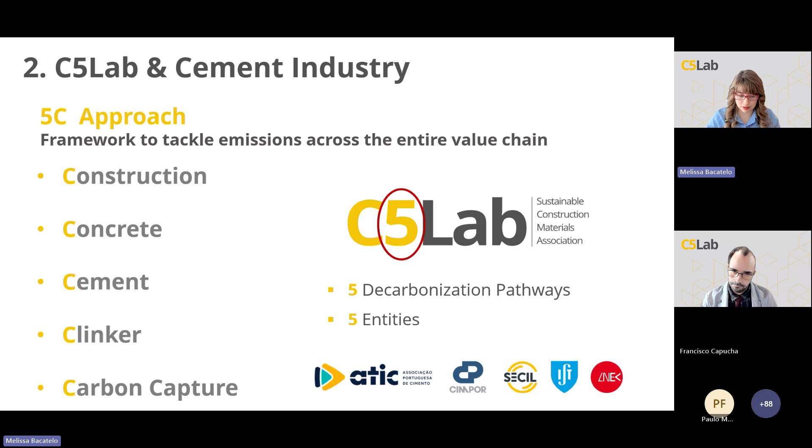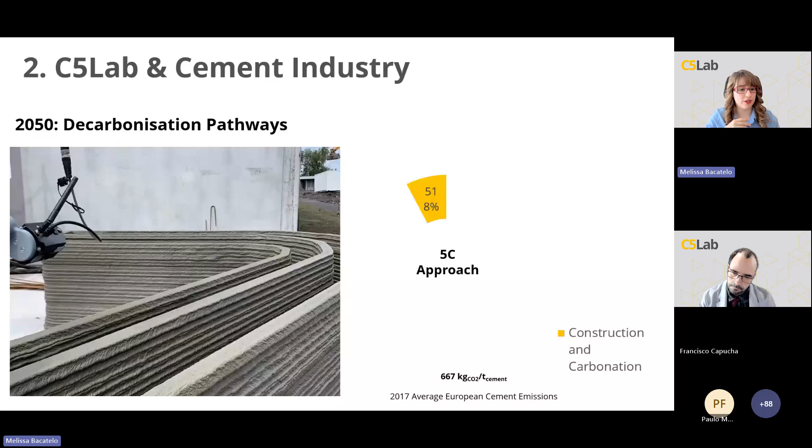Across these 5 areas, we tackle every opportunity for transformation. It begins with construction using technologies like 3D printing of concrete. We can also use captured CO2 to produce concrete with recycled aggregates and replace transportation with lower carbon alternatives.

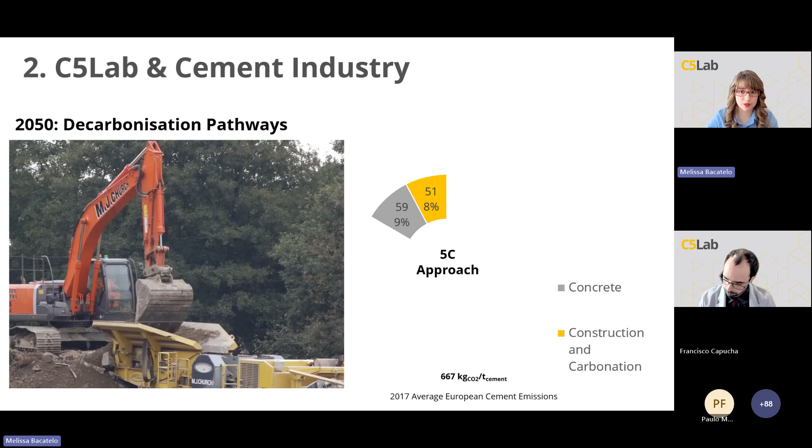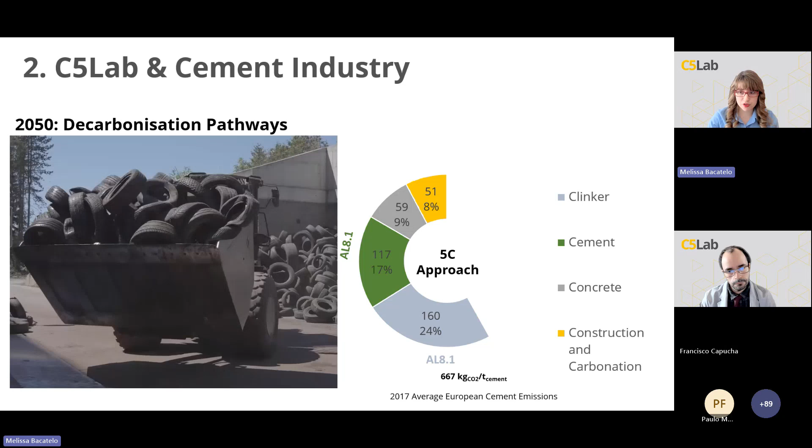In the cement stage, the focus shifts to clinker substitution and the adoption of renewable energies. In the production of clinker, there's potential to reduce emissions, namely through the use of alternative fuels such as scrap tires. These 2 pathways are further explored in the 8.1 project.

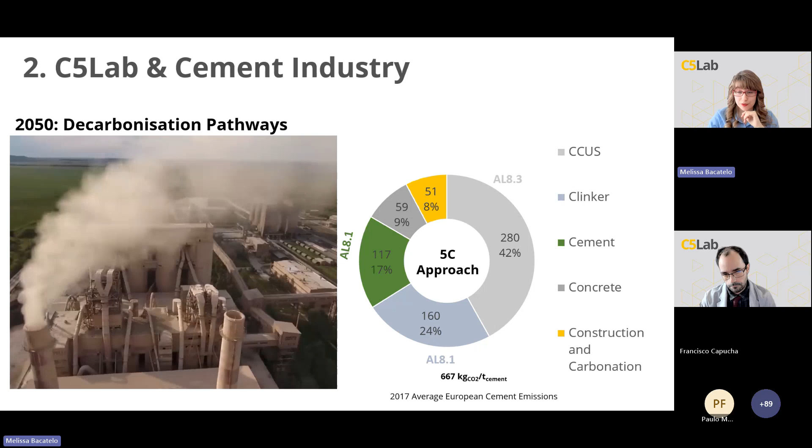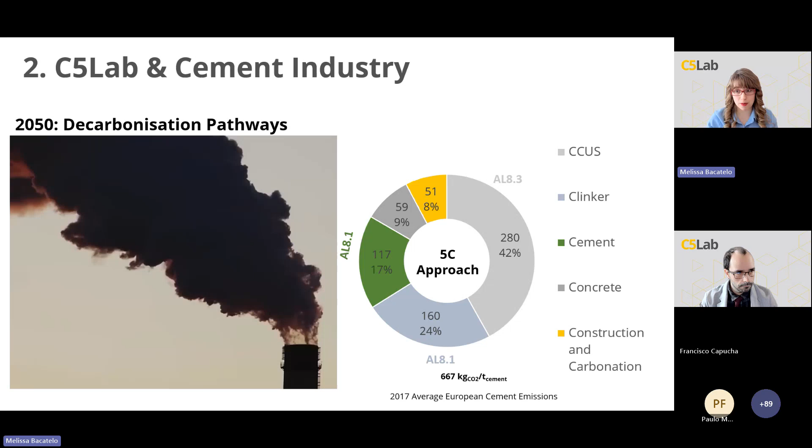However, carbon capture, utilization, and storage (CCUS) is an indispensable solution with the potential to reduce up to 42% of remaining emissions by storing it or transforming CO2 into usable fuel, for example, contributing to the industry's energy independence, as you'll see in Project 8.3.

At C5 Lab, all our work aligns with this vision through 3 core research areas, starting with CCUS. We're not just capturing CO2, we're giving it a second life. Our teams are developing processes to convert captured CO2 into synthetic fuels like methane or methanol.

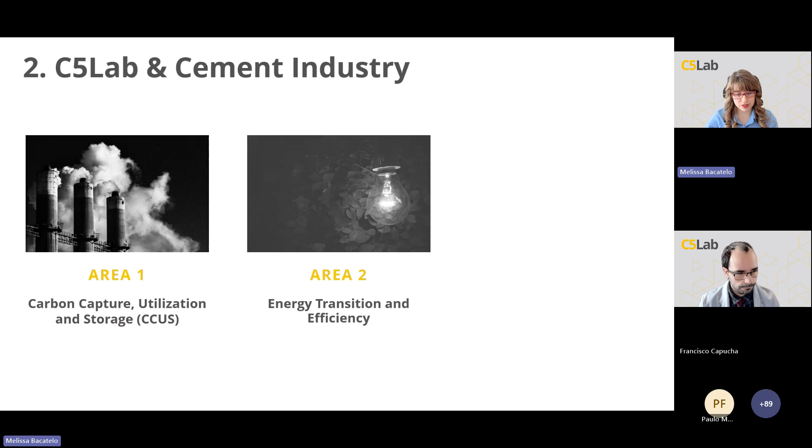The second area is all about energy transition and efficiency. We optimize grinding processes, improve heat recovery, and replace fossil fuels with green ones. The third area focuses on novel cementitious materials for sustainable construction.

We're rethinking materials from the ground up, developing eco-efficient concretes that use secondary raw materials, alternative binders, and recycled aggregates. Using life cycle assessment, we can evaluate each material's true environmental footprint. Together, these three areas turn a centuries-old material, cement, into a platform for innovation.

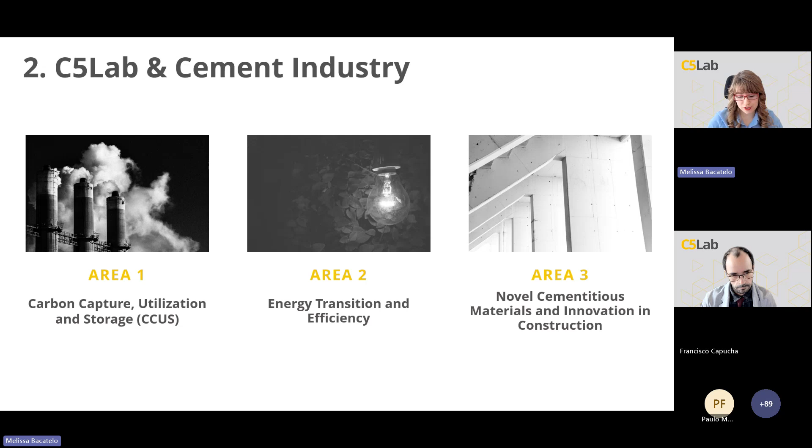In our daily work, we combine a wide range of skills to accelerate sustainability in the sector, from consulting, including environmental product declarations, to research and innovation projects. We carry out in-depth analysis in our lab, and we complement these activities with technical training, empowering teams to implement sustainable practices.

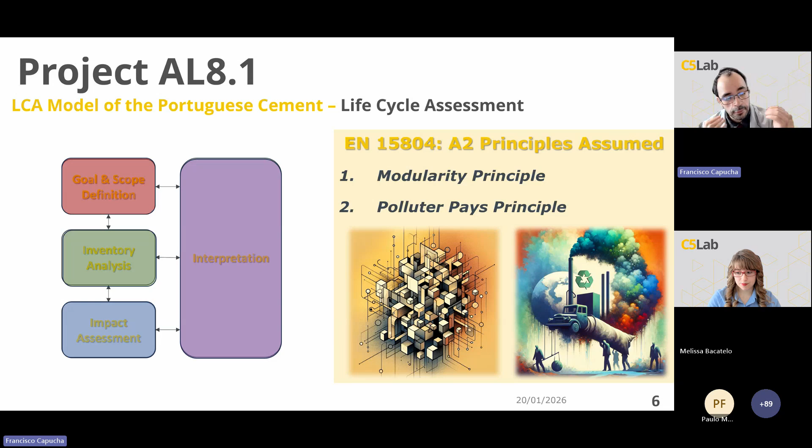In addition, the boundaries of the system study also follow some principles, named the principle of modularity, whereby processes must be assigned to the module where they occur, and the polluter pays principle, whereby the impacts of waste are attributed to the system that generates it.

The main life cycle assessment model is a cradle-to-gate study whose declared unit is 1 ton of Portland grey cement, and it was prepared in accordance with standards, namely standard EN 15804, which is the standard for producing environmental product declarations.

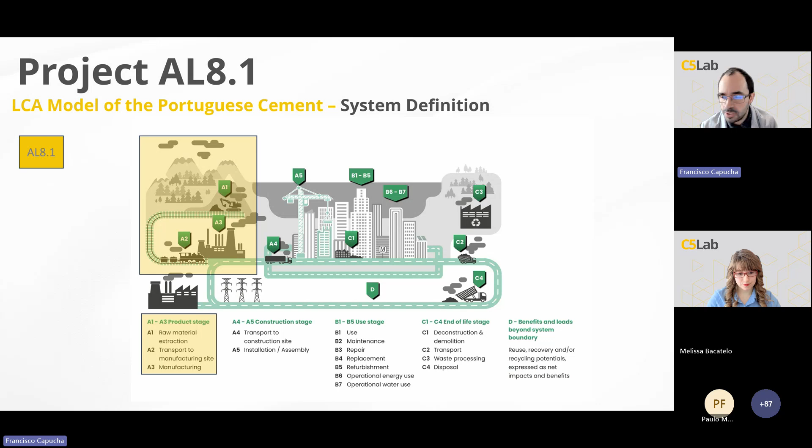Being a cradle-to-gate eco-profile means that the model covers information modules from A1 to A3. This means A1, raw material extraction, A2, transport to the manufacturing site, and A3, the manufacturing itself.

As for the selected system boundaries, the geographic boundary is located within mainland Portugal. The reference year chosen was 2018, because the project started in 2020 and, for reasons of industrial confidentiality, only data that is 2 years old could be used.

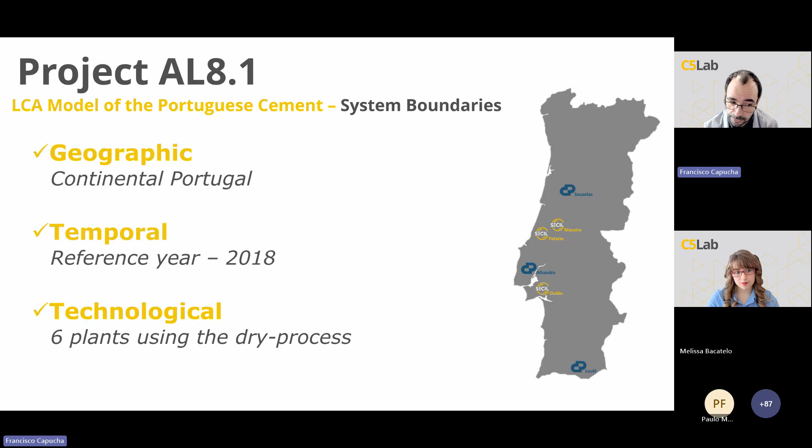Finally, it should be noted that there is a great deal of technological homogeneity, as all manufacturing units use the same production method, which is the dry process.

In order to properly model the life cycle of a product, the life cycle assessment analyst must understand the entire manufacturing procedure. For cement, it starts with the procurement of raw materials, being them either primary or secondary, with either external or internal origin.

This is followed by the transportation of these raw materials and fuels to the manufacturing site, by either freight transport or conveyor belts in the case of the internal quarries.

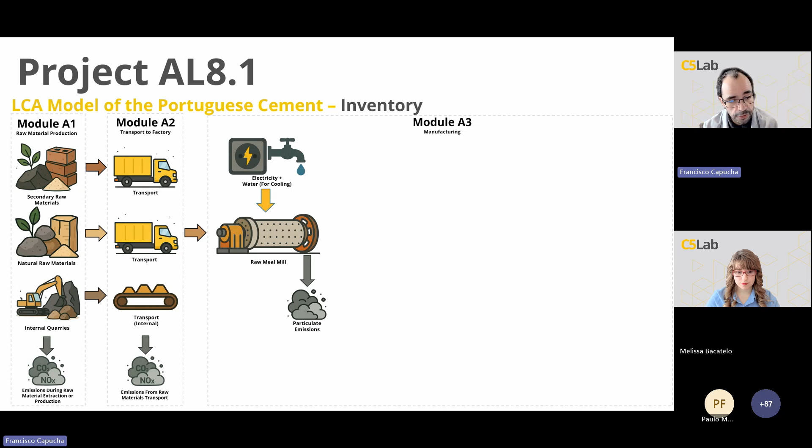As the raw materials arrive at a manufacturing facility, they enter a mill denoted the raw mill, in predetermined fractions, where they are milled to prepare them for the next step, which is the rotary kiln. Within it, temperatures reach up to 1400 degrees, with key reactions occurring, particularly calcining, which creates the intermediary product clinker, the main constituent of Portland cement.

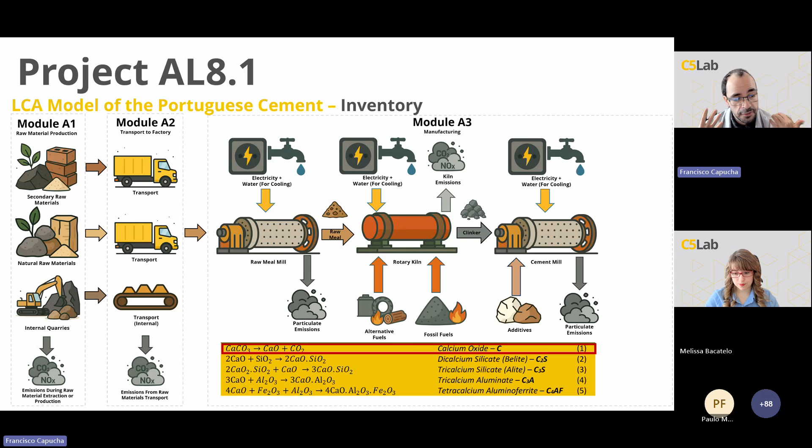After cooling, the clinker enters the cement mill, where, together with predetermined mixtures of additives, it is milled to produce the desired cement blend.

It should be noted that for the modeling of this model, we considered electricity generation to be foreground, even though producers have no direct influence over it, but it's such an important process that it had to be modeled using primary data. For the background processes, whose producers do not have direct influence, such as the production of additives, generic data was used, and this generic data is usually referred to as secondary data.

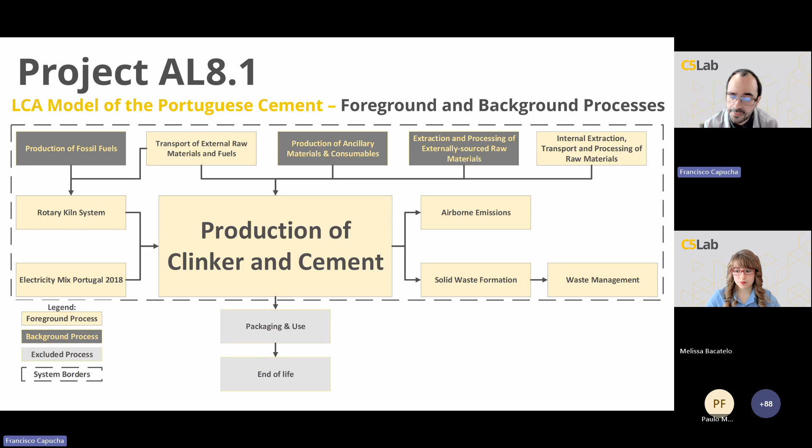All primary data is based on industrial statistics from the 6 factories. As for the secondary data, it was obtained from Ecoinvent 3.9.1 or other EPDs.

The primary data was collected in collaboration with the Portuguese cement industry, represented by ATIC, Secil, and Cimpor, on behalf of C5 Lab. However, industrial confidentiality required the consolidation of data. Therefore, in collaboration with the industry, an automatic consolidation sheet was developed to allow data to be provided anonymously.

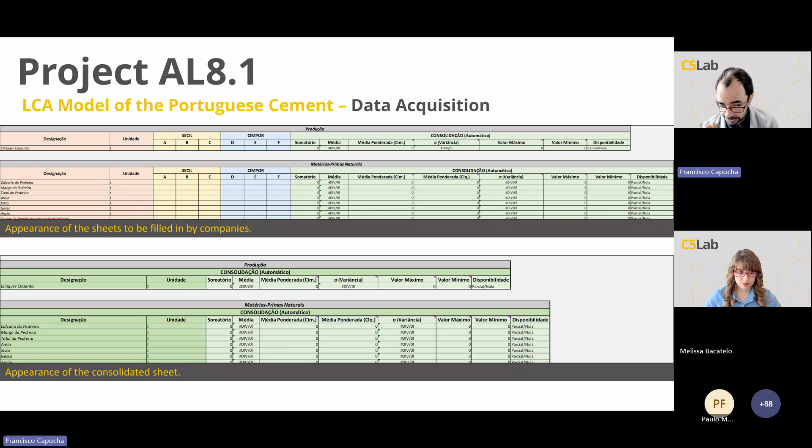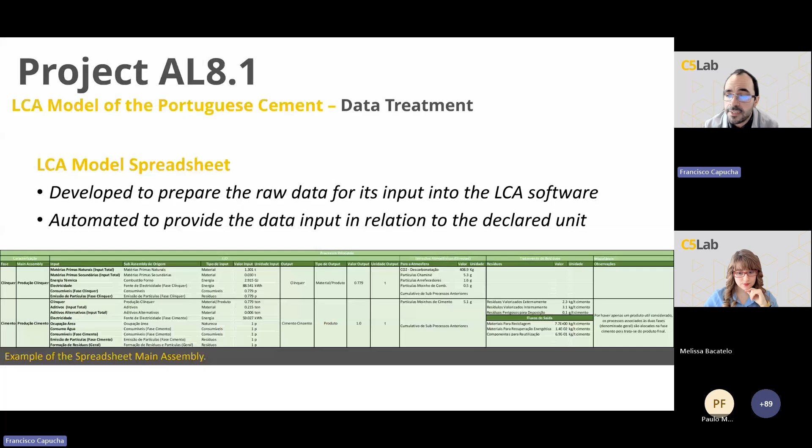With all data collected and consolidated, there's then the need to process it to be suitable for the LCA software. An automated spreadsheet was programmed to calculate the flows according to the declared unit, preparing the data for input into the lifecycle assessment software, which in this case was SimaPro.

Once the manufacturing process is known and the entire inventory data is provided, the life cycle assessment analyst creates flowcharts to guide them to produce the manufacturing procedure.

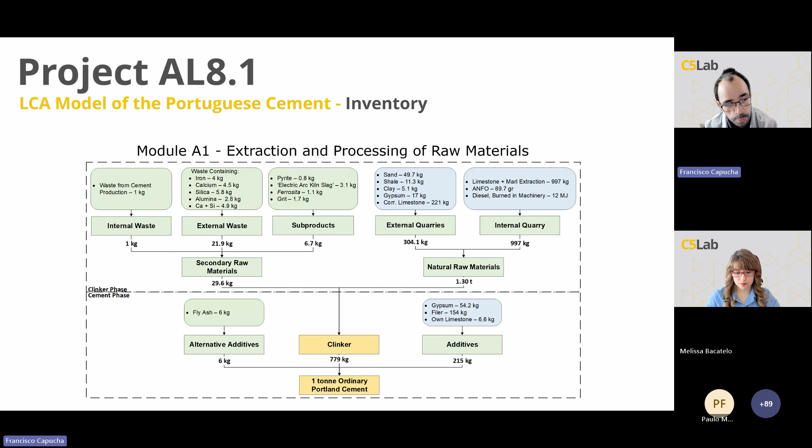The following diagram illustrates the flows associated with module A1, which is concerned with the extraction and processing of raw materials. Here you can see the flow of raw materials needed to produce one declared unit, which is 1 ton of ordinary Portland cement.

Since the reference year was 2018, we used the energy mix for that year, and we obtained this information directly from REN, which is the Portuguese entity responsible for the handling of electricity.

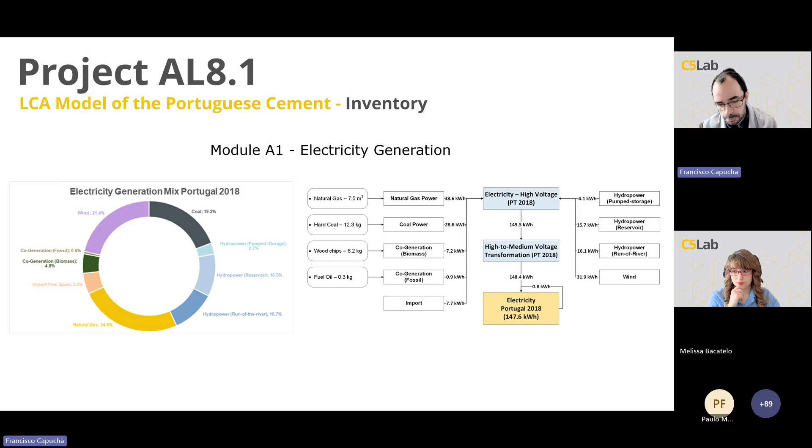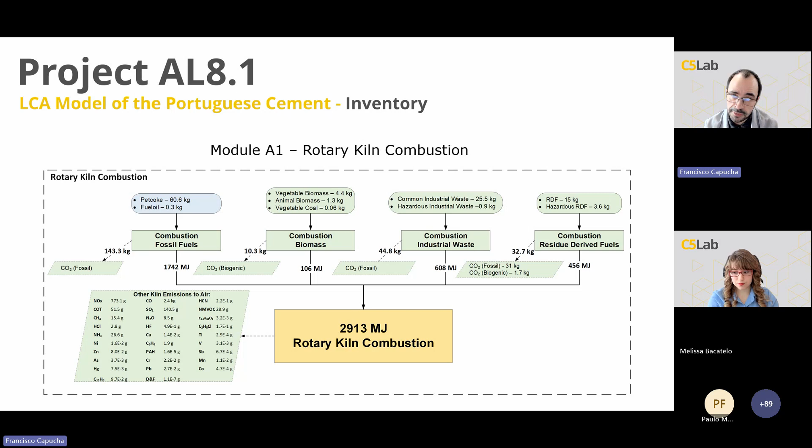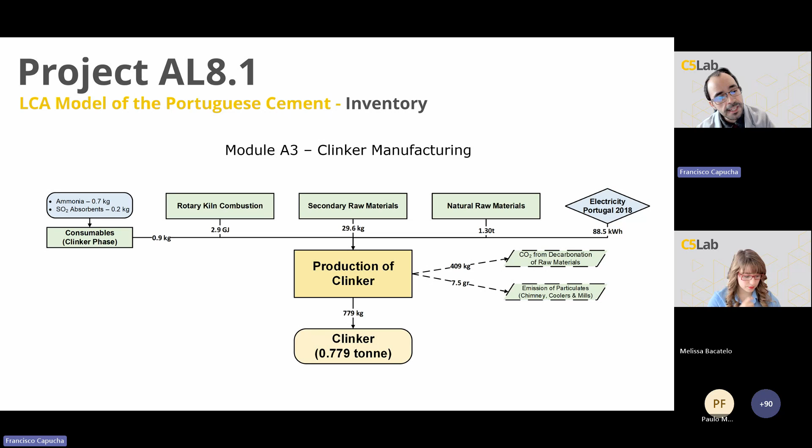As for module A3, it corresponds to the manufacturing procedures themselves for the products. This diagram illustrates the flows necessary for the manufacturing of the intermediary product clinker in sufficient quantity for the production of the declared unit, which can be seen in the following diagram.

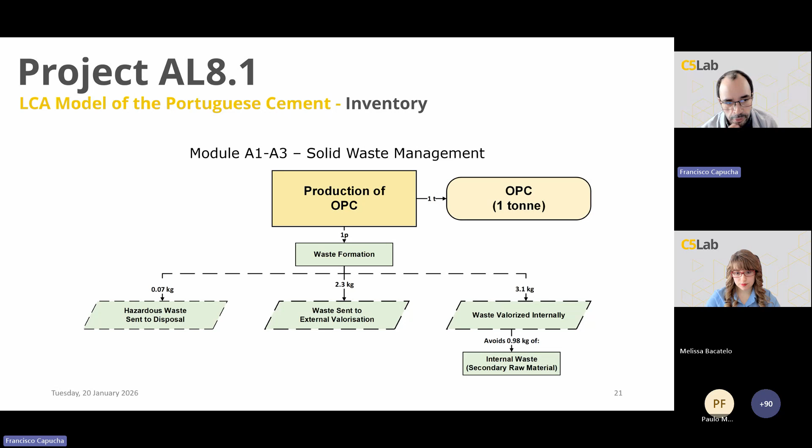Waste is generated throughout the whole production chain, and so the management of this waste is also modeled throughout the production, and you can see here in this diagram the production of waste and its management.

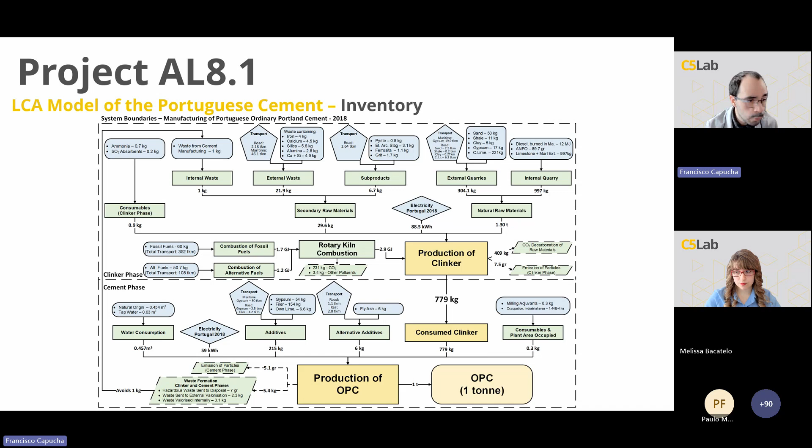And finally, we have the following chart, which depicts the entire manufacturing chain. This is the entire model that was inputted into the LCA software. It is all the flows necessary to produce 1 ton of the average Portuguese grey cement. This was modeled in the software SimaPro and includes all necessary flows.

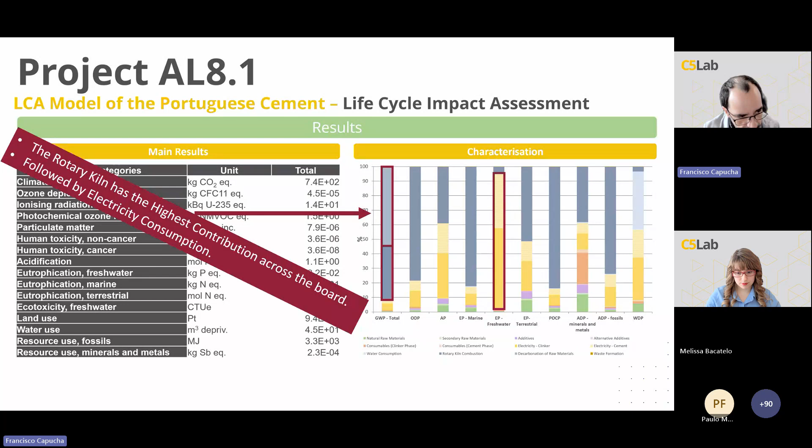This was then followed by electricity consumption, which is also highly relevant in some categories, such as freshwater eutrophication or acidification, concluding that energy consumption, together with calcining, is the major contributor to the cement environmental profile.

This is further supported by the carbon footprint, where it's clear that the activity in the rotary kiln, so the fuel combustion and the calcining reaction, has by far the highest contribution, followed by electricity consumption, with all remaining processes contributing only around 1%.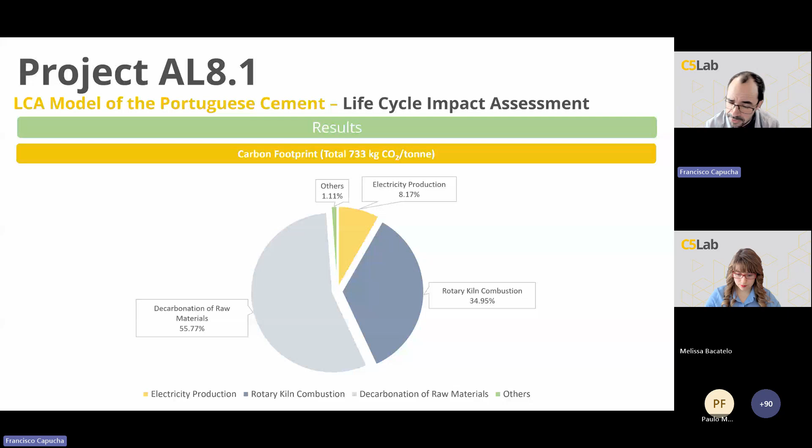The trend continues when analyzing the primary energy depletion, where it's possible to conclude that the rotary kiln depletes over 2.3 gigajoules of non-renewable energy. This model does not consider the procurement of alternative fuels, because due to the producer polluter pays principle, they are excluded from the model. This is then followed by electricity generation, which depletes around 1 gigajoule.

However, due to the high incidence of renewable energy in Portugal's electricity mix, around 70% of it is considered renewable.

As for waste management, cement manufacturing is a highly efficient and mature industrial process, whereas only around 6 kilograms of waste are generated per ton of cement produced, and over 91% of it is valorized, either internally or externally.

In parallel, we also conducted a benchmark against some of its peers, concluding that the Portuguese average cement is equivalent to a European average CEM2 cement. This is noteworthy because the Portuguese average cement includes the production of cements with high clinker content, such as CEM1, whereas CEM2 is a blend with lower clinker content. So we are equivalent to that.

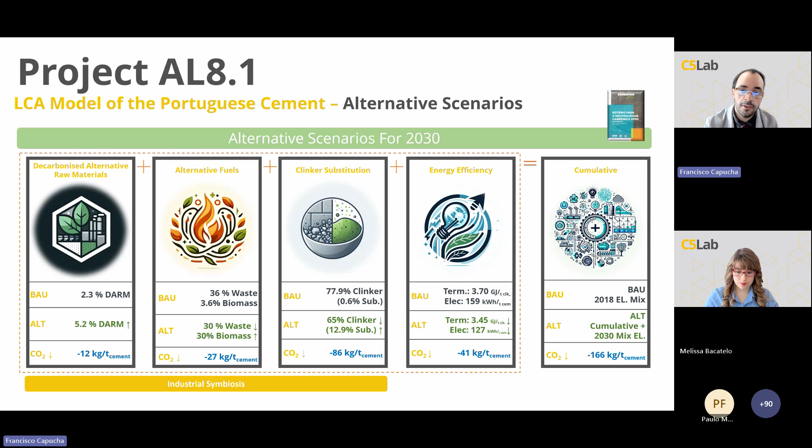We introduced this data into the new model, and the results for the alternative scenarios based on industrial symbiosis showed that the use of alternative raw materials and clinker substitution resulted in a reduction of carbon emissions. However, the use of alternative fuels led to a slight increase in emissions.

This was unexpected, and this increase was due to the fact that at the time, the modeling technique accounted for the biogenic emissions, so they contributed to the environmental impact. This is not currently used in cement manufacturing life cycle assessment models. Therefore, the results will be a bit different nowadays.

The replacement of clinker produced the most significant reduction due to the ambitious target of 65% average clinker content. Finally, we can also conclude that the inclusion of energy efficiency measures further amplifies the reductions observed.

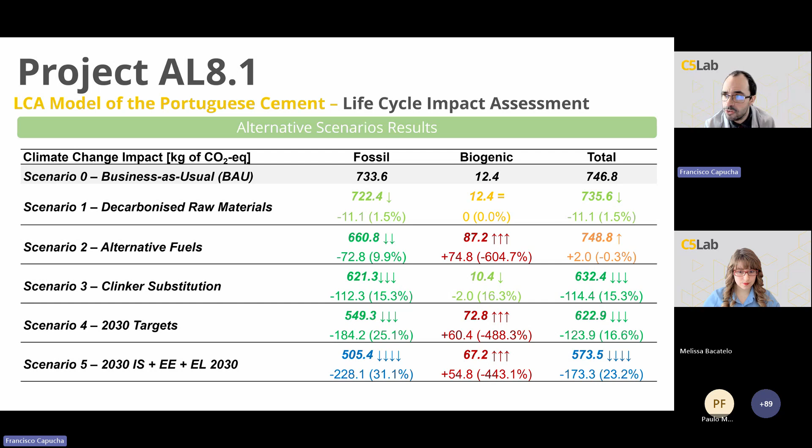When examining the variations in CO2 emissions, the effectiveness of clinker substitution can be observed, confirming the importance of controlling this ratio as the most important and most effective measure within the cement industry, other than carbon capture. We notice also a counterbalancing effect from the use of alternative fuels, caused by the increase of biogenic emissions.

However, with the new standards for assessing the environmental impact of cement, nowadays the alternative fuels used would actually produce a more robust reduction, so the results will be even more amplified nowadays.

Finally, a standardized comparison was made between the study results and the cement expectations for 2030 to assess its feasibility, and it can be inferred from the results that they are in line with the industry expectations, with only a slight higher impact than expected.

So we therefore confirm that the industry expectations, as set out in the roadmap for ATIC and CEMBUREAU, are realistic and can be enforced.

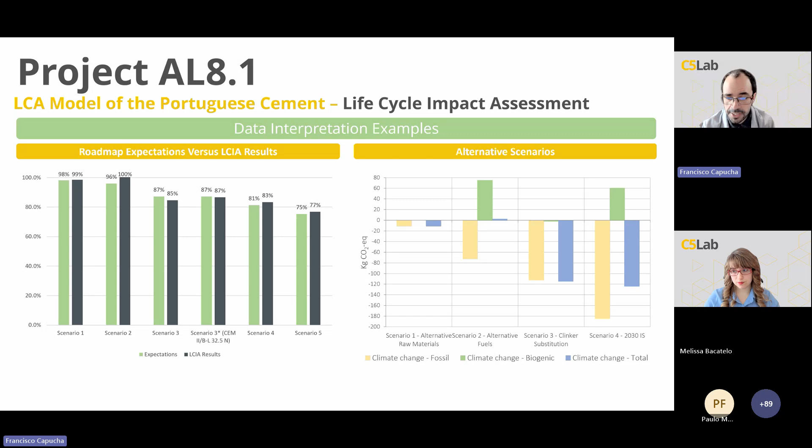Now we move to the second goal of Project AL 8.1, which was the development of the first EPD for Portuguese cement. An EPD, or Environmental Product Declaration, is a document registered and verified by an independent entity that communicates information about the environmental impacts during the life cycle of a product in a transparent, comparable, and credible manner.

It declares the environmental performance of a product based on the life cycle assessment models, with all information being verified by an independent entity, which guarantees transparency and enables an unbiased comparison of products. Since the results are pre-verified, environmental product declarations allow for a safe comparison of equivalent products across multiple databases.

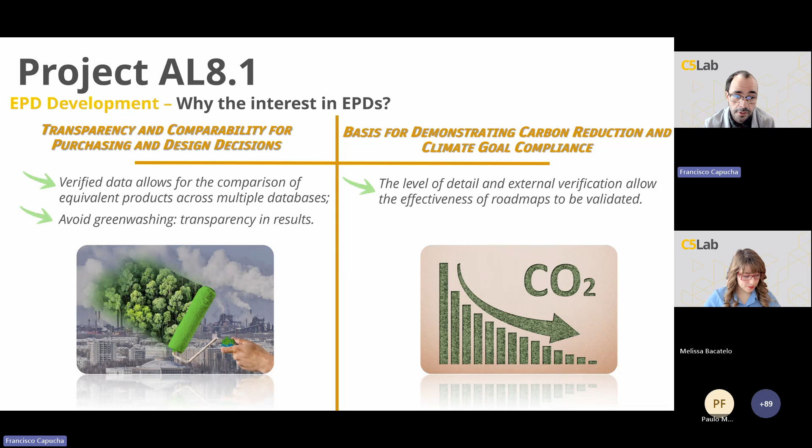This avoids greenwashing as all results must be validated before publishing. In addition, since EPDs are sourced from highly detailed life cycle assessment models and are verified, they allow, throughout the years, an accurate evaluation of the effectiveness of the environmental roadmaps of any sector.

There is a growing demand for building certifications such as LEED, and these often require environmental information that could be available from environmental product declarations. Without them, generic data may be used, and this could negatively affect results because generic data tends to be more conservative.

Moreover, there will be an increased integration of environmental information in documents, such as the declarations of performance, whose data can also be obtained from environmental product declarations. Therefore, companies that already implement environmental product declarations will be better prepared for its integration in such documents.

In reality, starting this year, the global warming potential will be mandatory as part of the declaration of performance, followed by a European mandate to perform life cycle assessment for buildings over 1,000 square meters in 2028.

In 2030, not only will additional indicators such as acidification be added to the declarations of performance, but life cycle assessment will be mandatory for all building sizes, finalizing in 2032, when the declaration of performance will essentially fuse with EPDs, and all information currently in EPDs shall also be present in the declaration of performance.

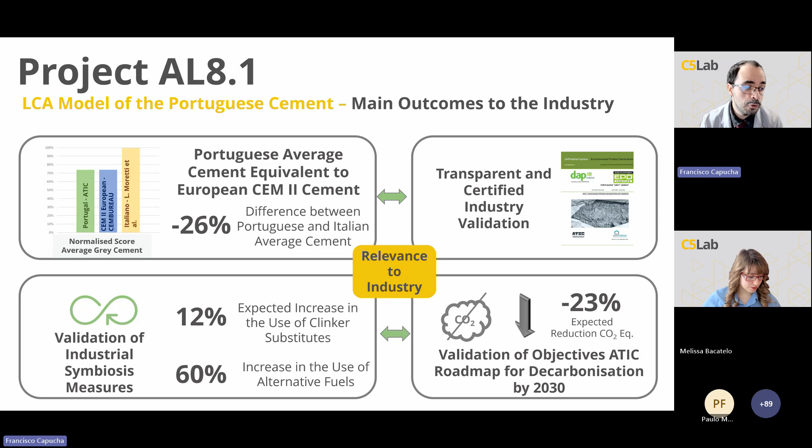The project was also able to confirm that the industrial symbiosis measures led to a 23% decrease in carbon emissions, validating ATIC's carbon neutrality roadmap.

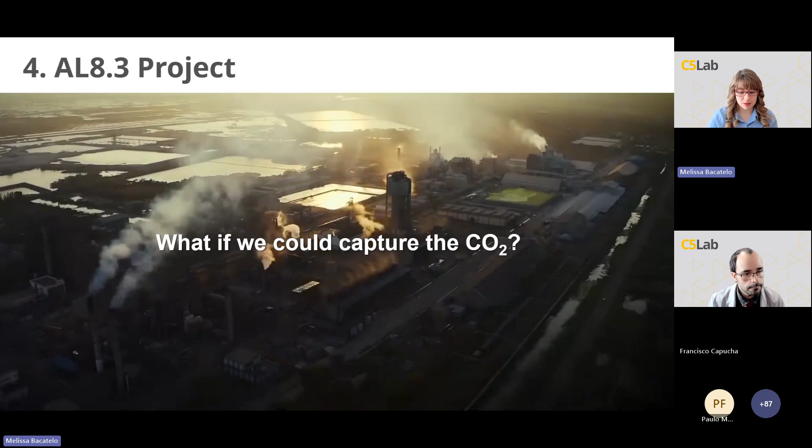Thank you, Francisco. So far, we've been imagining the world up to 2030. But what if we could capture that CO2 before it was even emitted into the atmosphere? Since CO2 emissions are intrinsic to the cement manufacturing process itself, it's particularly interesting to explore how we can capture these emissions. Imagine the cement factory emitting CO2: we can capture that CO2, combine it with hydrogen produced from renewable energy, and convert it into methane. The methane is then fed into the natural gas system to which the factory is connected, creating a closed loop that recycles CO2.

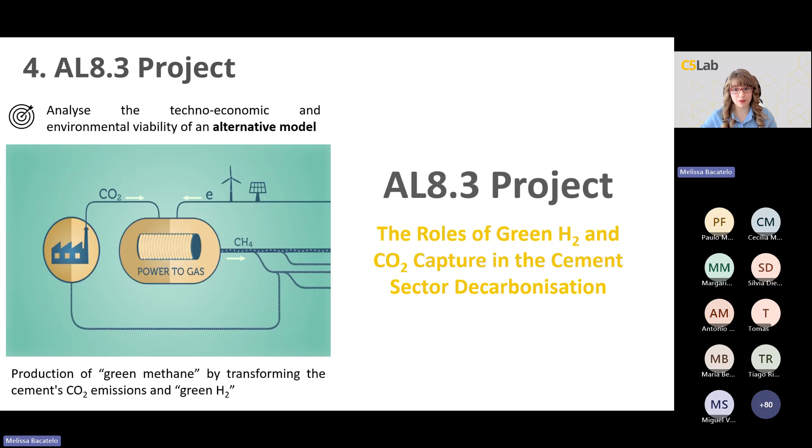The aim of the AL8.3 project was to design and analyze the techno-economic and environmental viability of such an alternative cement model. This promotes not only cement decarbonization, but also circular carbon economy and the factory's energy independence in an economically viable way, with a long-term vision towards 2055 at an industrial scale.

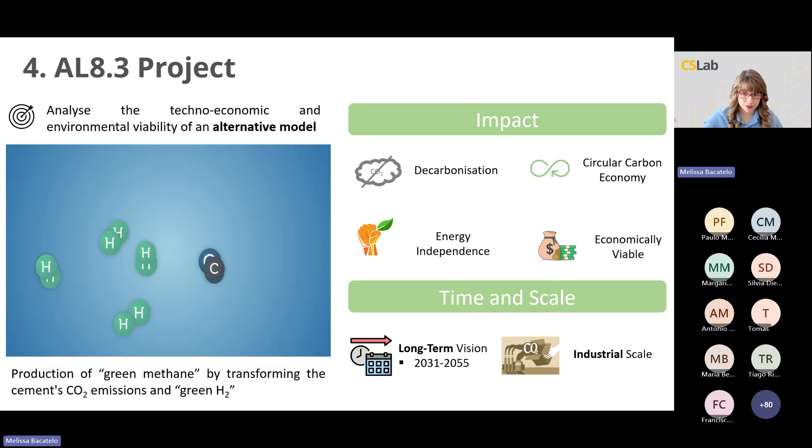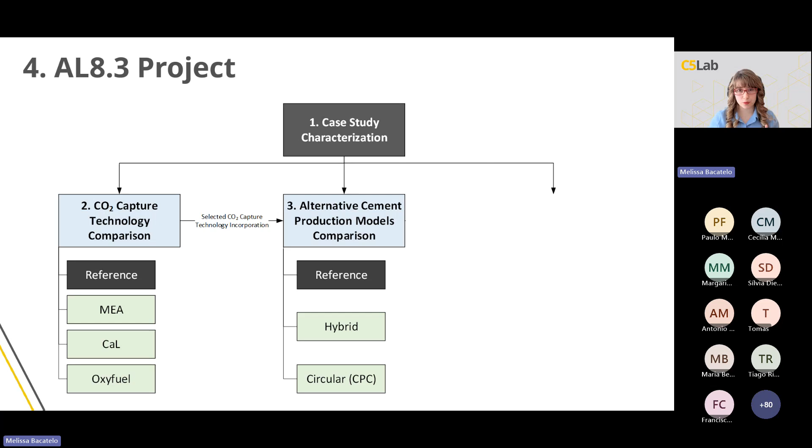The methodology was divided into 4 parts. We began by characterizing the case study to create a data benchmark for the next phases. Next, we compared 3 CO2 capture technologies through a multi-criteria evaluation covering technical, economic, and environmental considerations to select the most feasible one. The selected CO2 capture technology was then integrated into 2 proposed alternative cement production models, constituting the third part of the research. Finally, we carried out a life cycle assessment comparing conventional production with the selected innovative model, also analyzing different renewable energy sources.

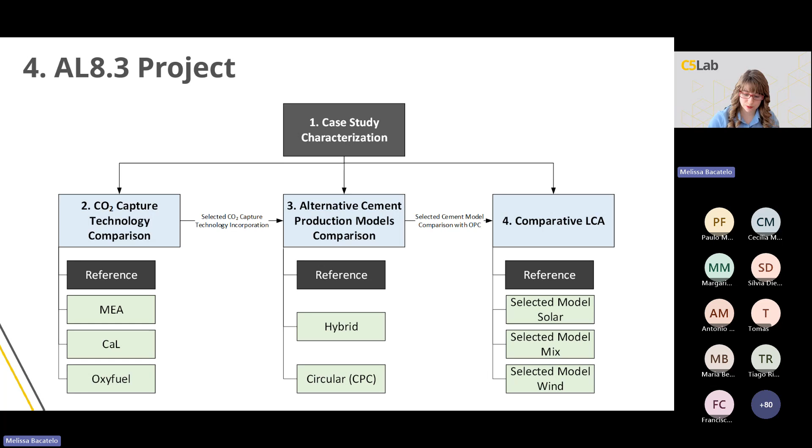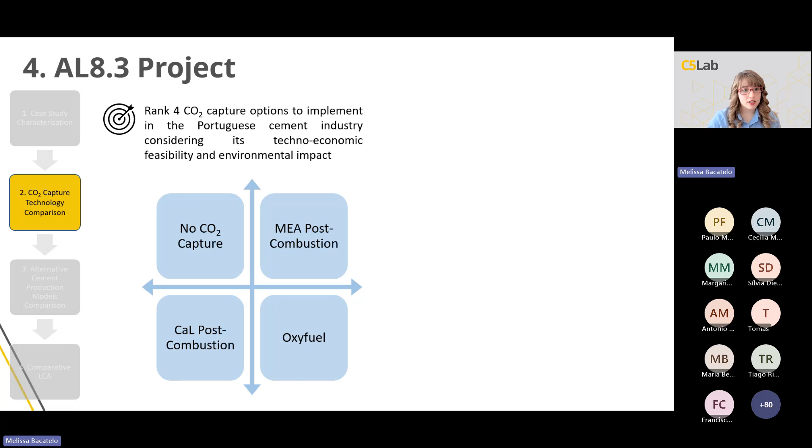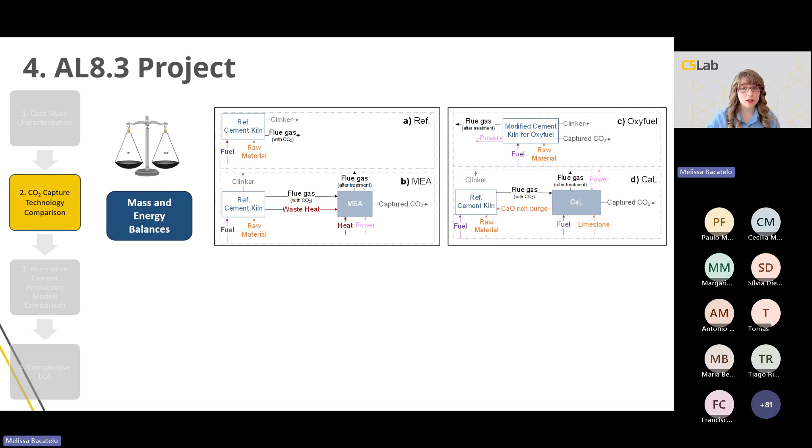We started by characterizing the Portuguese cement industry. Next, we compared 4 CO2 capture options based on techno-economic and environmental criteria: an option with no capture, monoethanolamine, calcium looping, and oxyfuel. The system boundaries were cradle to gate across 3 future scenarios. We calculated mass and energy balances and accounted for economic uncertainties due to the low maturity of these technologies.

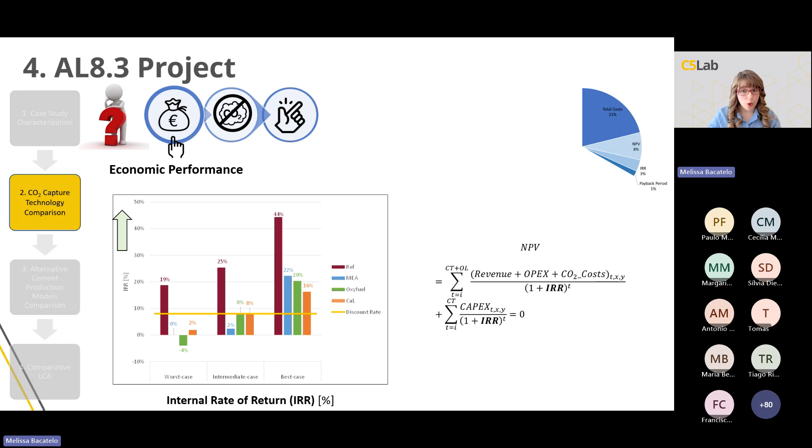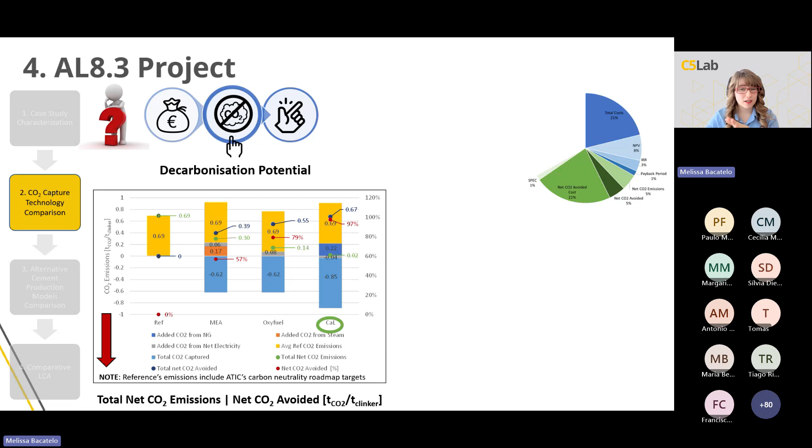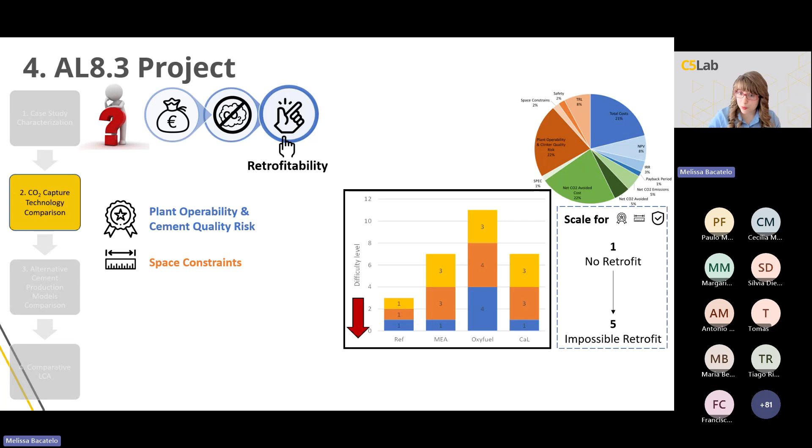We assessed economic performance using indicators like the net present value, which we aim to maximize. We also looked at the internal rate of return and the payback period. To assess decarbonization potential, we compared CO2 emissions of each alternative: they are lower for calcium looping, however oxyfuel requires less energy. We also rated retrofitability based on cement quality risk, space constraints, safety issues, and technology maturity.

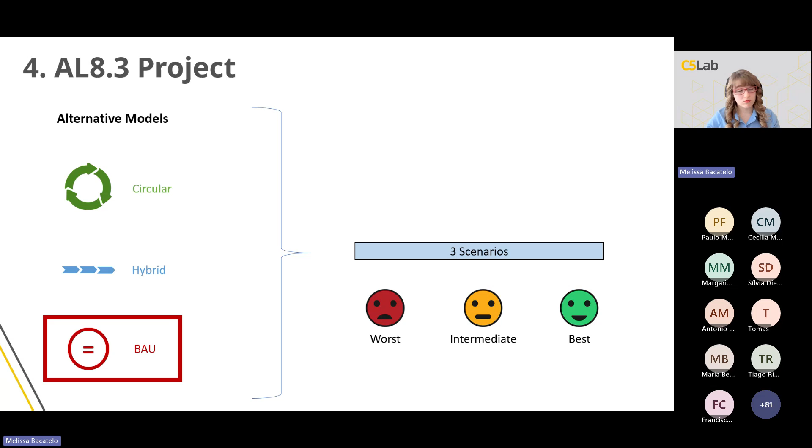Calcium looping moved on to the third research phase, where we compared 3 cement production models across 3 scenarios. First, the business as usual: no capture, no reuse, that's our baseline. Then, the circular model, where we capture the CO2 emitted by the clinker kiln and use water electrolysis to produce green hydrogen and oxygen too. That oxygen doesn't go to waste; it powers the calcium looping CO2 capture system.

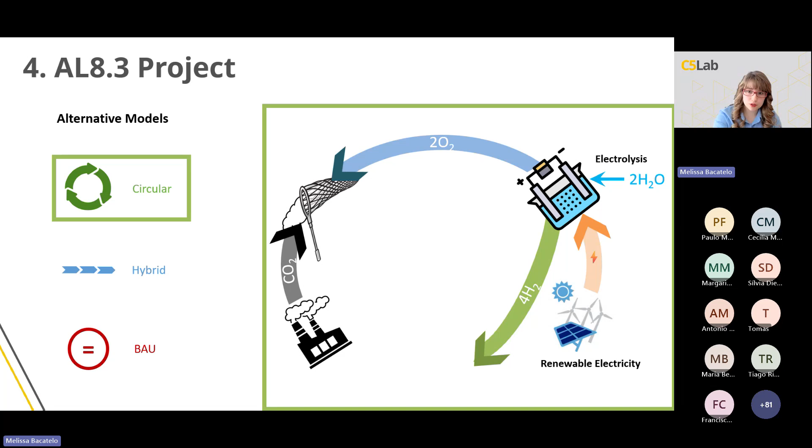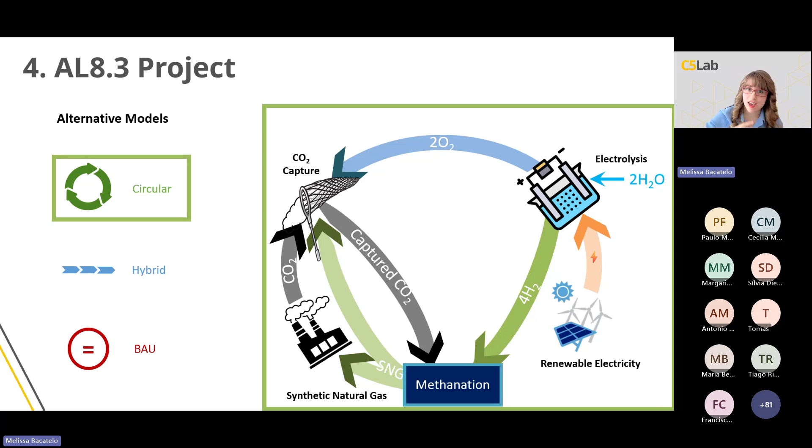Then comes the cool part: hydrogen and CO2 react to create synthetic natural gas, and that gas fuels both the kiln and the capture unit — a true circular CO2 loop.

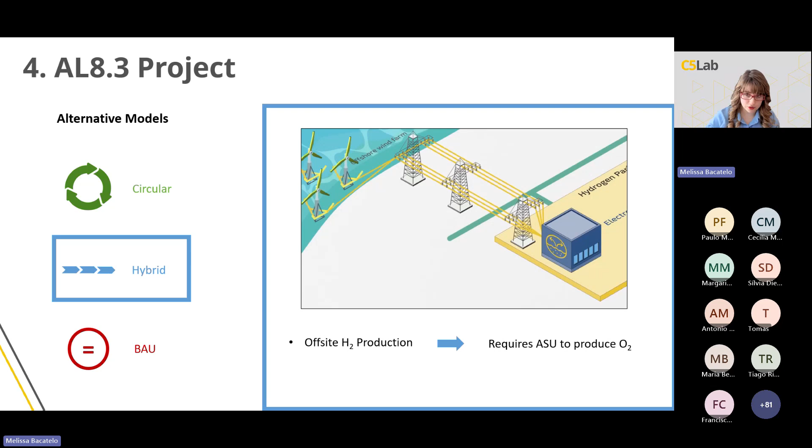In the hybrid model, things shift a bit. Hydrogen is transported through a dedicated pipeline, so there's no electrolysis on site, which means we need an air separation unit to produce oxygen. The CO2 is still captured and converted, but the methane is sold, not reused.

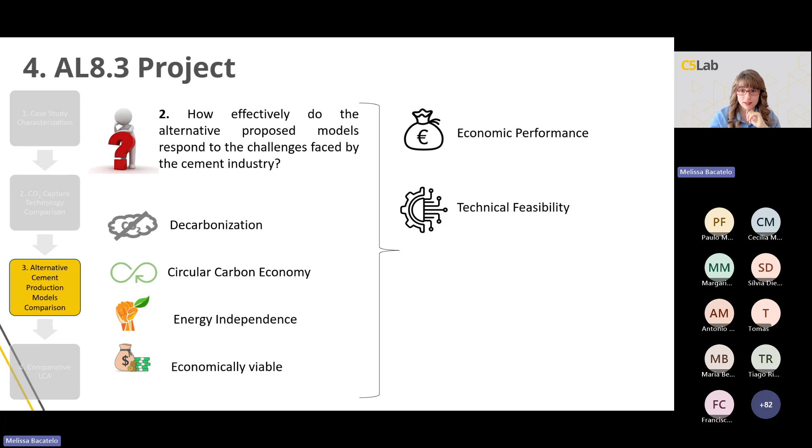So, which model gets us closest to our goals? To answer that, we broke our analysis into 4 pieces: economic performance, technical feasibility, decarbonization potential, and finally, eco-efficiency. I won't get too technical here, but we ran full mass and energy balances using primary and secondary data.

On economics, we looked again at the NPV, and it changed a lot depending on the scenario. In the best cases, both the business as usual and circular models were viable, but in the worst, none were. The internal rate of return favored the business as usual in an ideal scenario.

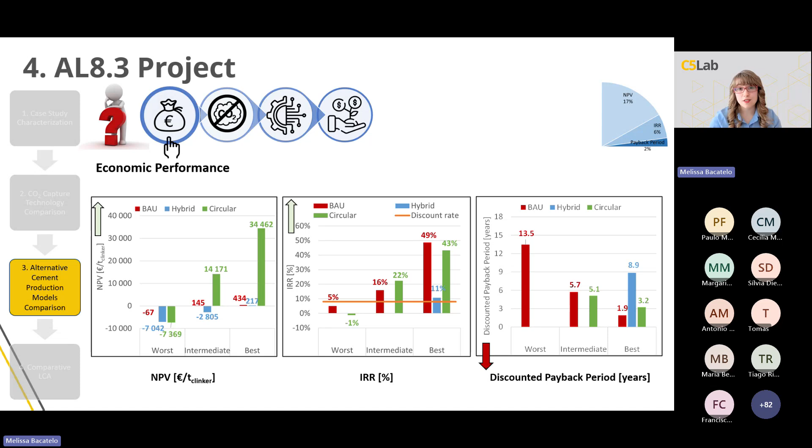But in more realistic conditions, circular takes the lead. And how fast can you get your money back? No surprises here, the shortest payback happens in the reference case.

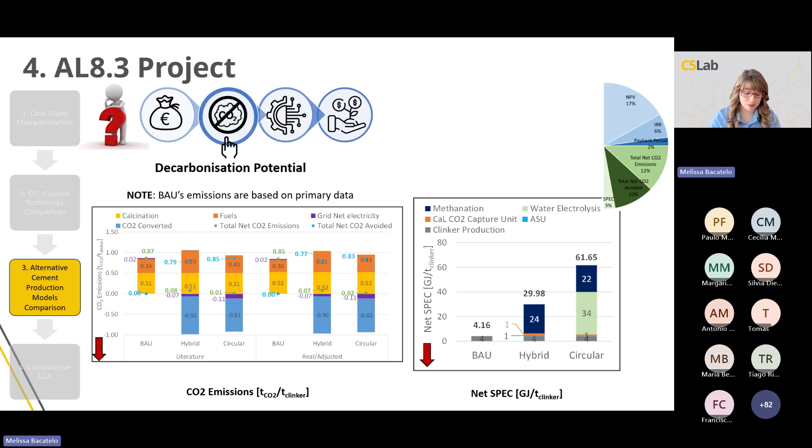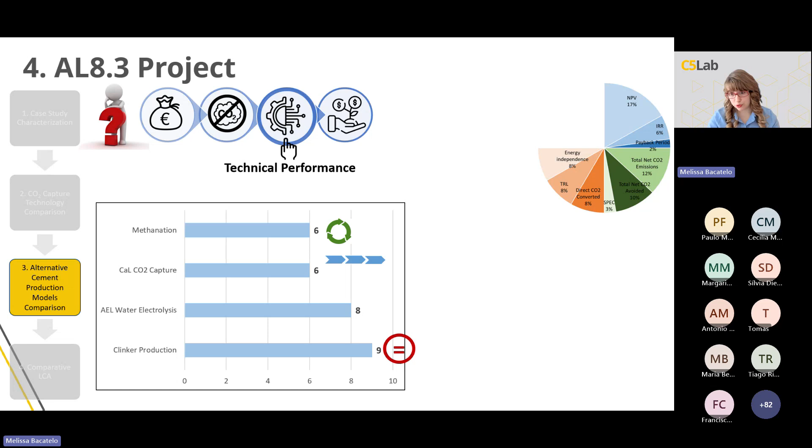The environmental analysis revealed that the circular model can reduce CO2 emissions by up to 98%, and even the hybrid model shows a significant reduction of 91%. But it comes at a price: the primary energy required for the circular model is 15 times higher than the reference, while the hybrid model is around 7 times. In terms of technical performance, the alternative models obviously have a lower technology readiness level than business as usual, but they present a higher energy independence.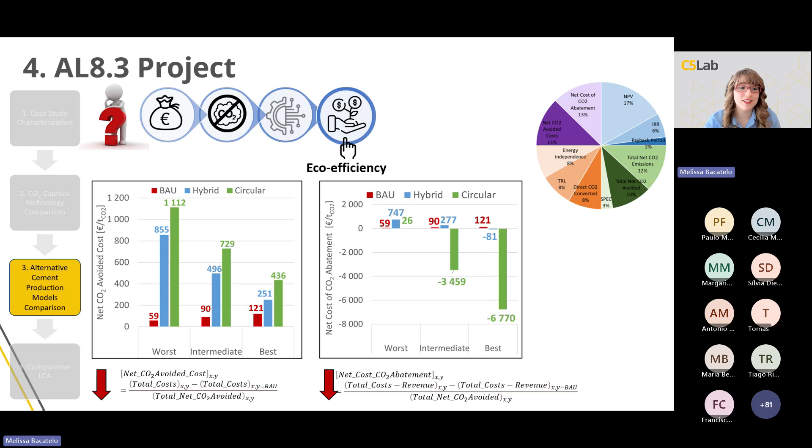To understand eco-efficiency, we merged emissions data with cost analysis. And here's the twist: selling surplus methane and oxygen makes the circular model look even better. The multi-criteria analysis revealed that the circular model ranked highest overall.

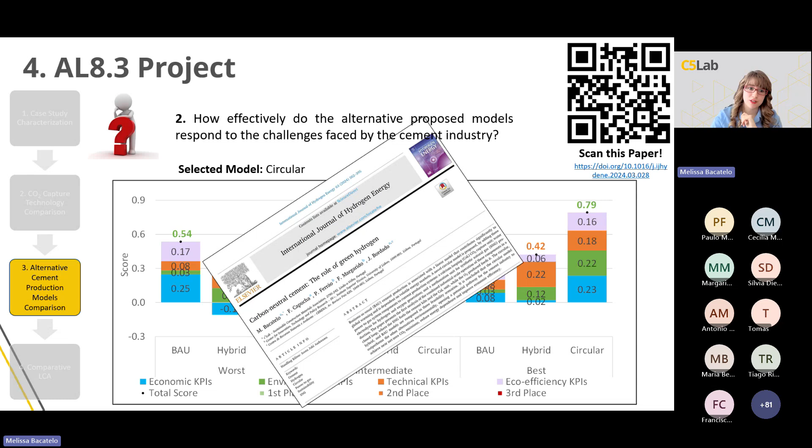Following on from this research, a second paper was published in the International Journal of Hydrogen Energy. Again, please scan this paper.

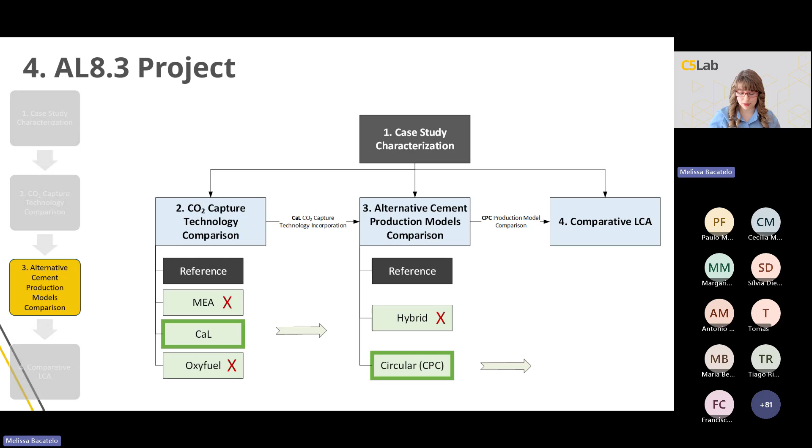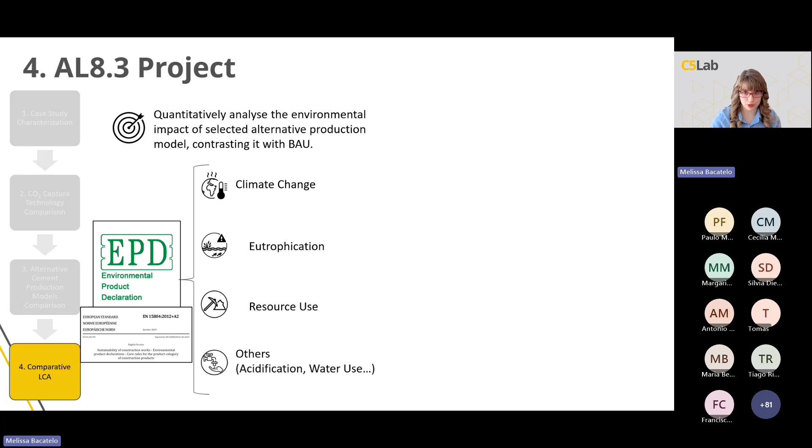With the circular model selected, we moved to the fourth and final research phase. Our final goal was to analyze the circular model's environmental performance using the same standards applied to construction products. We looked at key impact categories: climate change, eutrophication, resource use, and others like acidification or water use. We ran 2 models in SimaPro and tested 3 energy sources for electrolysis: solar, wind, and a mix of both.

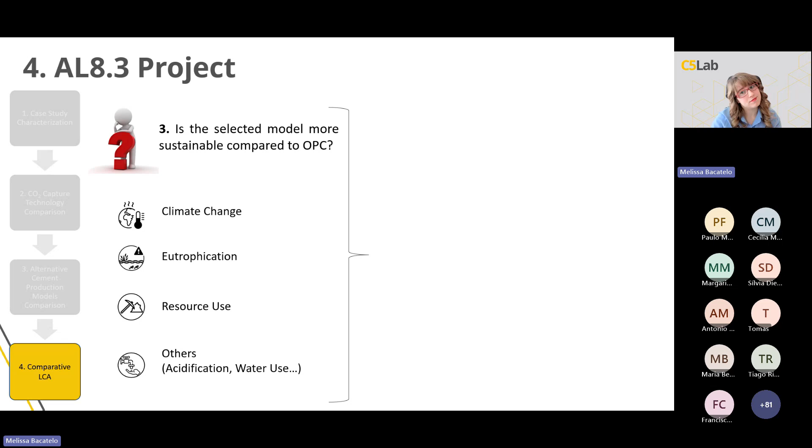This leads us to our final research question: is the circular model truly more sustainable? We broke this question into 3, starting by comparing the environmental impact associated with the circular model and business as usual, tested different renewable energy sources, and found the environmental hotspots.

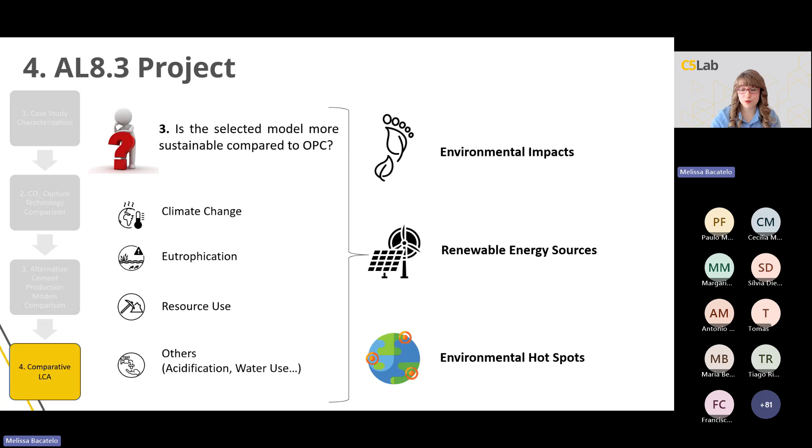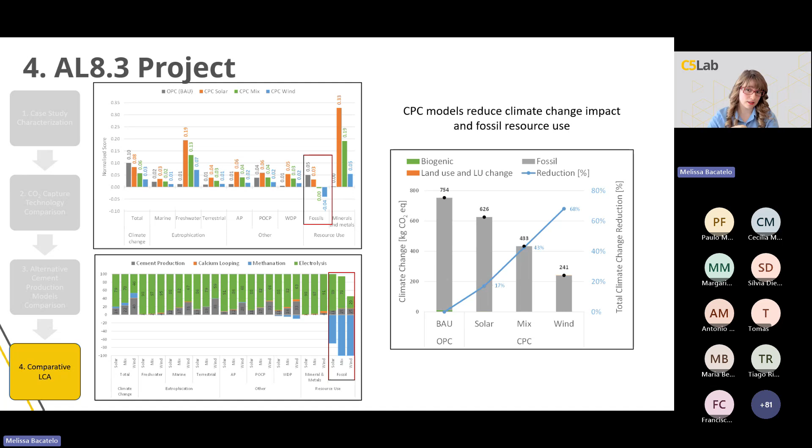The mass and energy balances were adapted to SimaPro, and the results show that the circular model can reduce the impact of climate change by up to 68% in the wind scenario. The hotspot analysis revealed a negative impact for fossil resource use, thanks to credits from avoided natural gas extraction through methanation. But here's the catch.

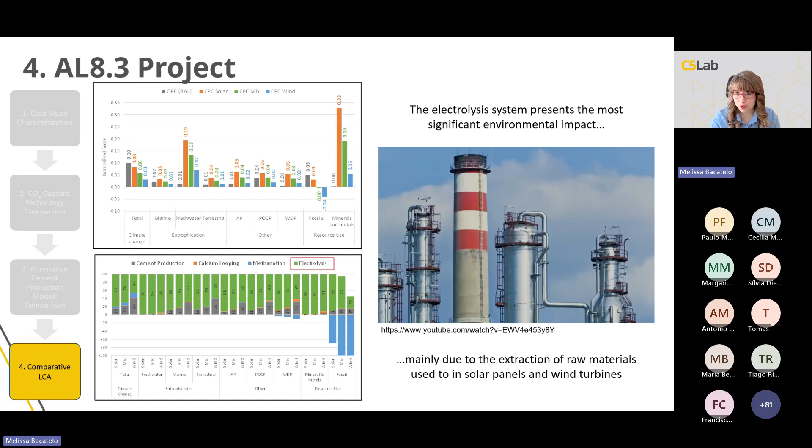Electrolysis had the highest environmental impact in all categories. And where does this impact come from? Mainly from the extraction of raw materials, some of which are rare, to produce the components of solar panels or wind turbines, although the impact of turbines is lower. In short, while the circular model offers major benefits, it also presents some trade-offs compared to the conventional model.

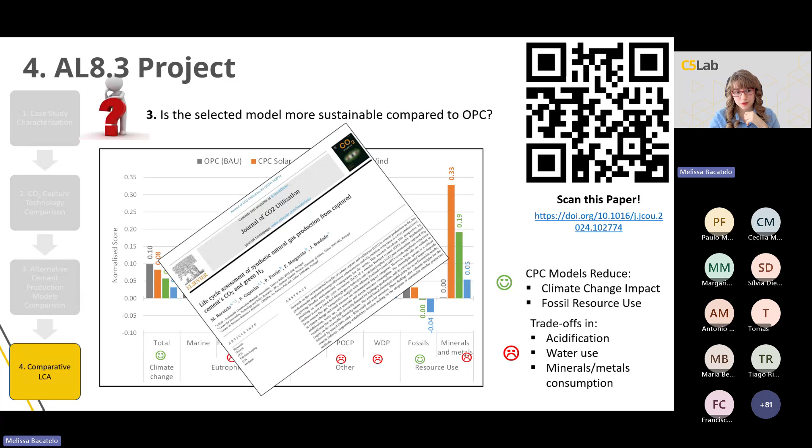A paper based on these findings was also published. This work involved at least 1 representative from each of the 5 C5 Lab associates. We also had the special contribution of Paulo Rocha and Alfredo Cardeiro in developing the decision support tool.

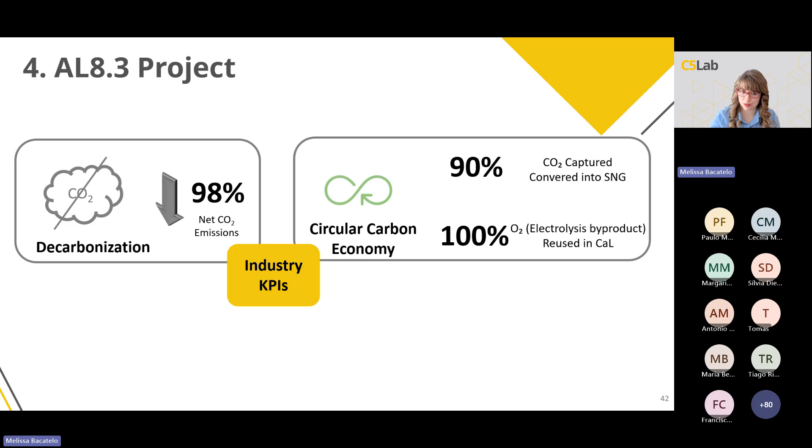So now let's see if we achieved the goals. First of all, the circular model reduces net emissions by up to 98% compared to the current model, converts 90% of captured CO2 into synthetic natural gas, and reuses 100% of the oxygen from electrolysis, thus contributing to the circular economy. In addition, it increases energy independence, and now we have 2 new sources of revenue through the sale of surplus synthetic natural gas and oxygen. This makes it an economically viable model, except in the worst case scenario.

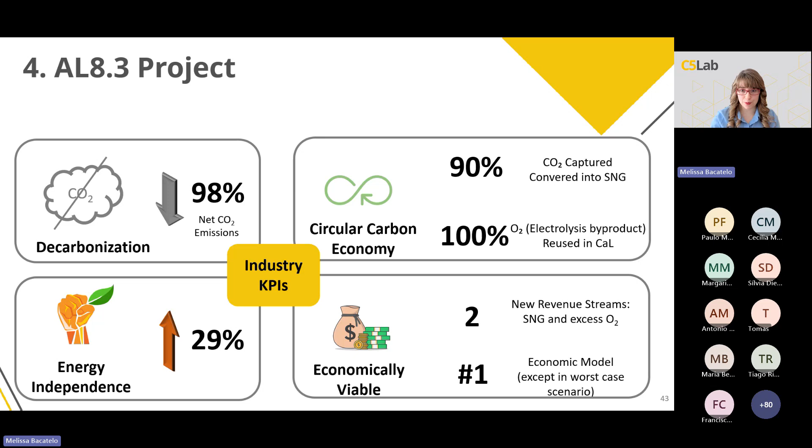This project resulted in 1 PhD, 2 awards, 1 national and 1 international, and 3 papers, 4 deliverables, 7 scientific events, and we produced a total of 19 reports.

I hope that throughout this presentation, you have found elements to reflect on the question I posed at the beginning: do you consider CO2 a friend or foe? The answer, as you can see, is not linear. It's actually circular. CO2 can be a challenge, but it is also a valuable opportunity within a sustainable circular system. Thank you very much for your attention.